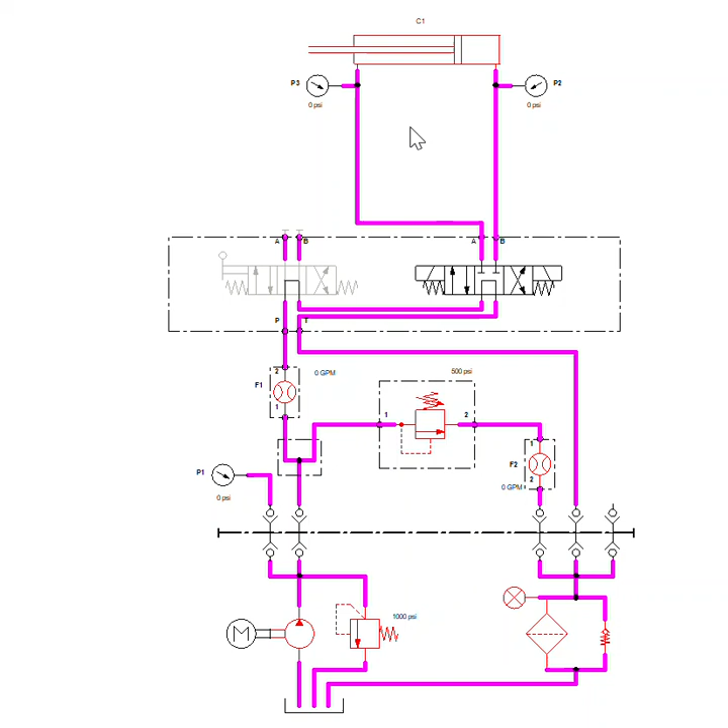Okay, this is MECH1395 hydraulic activity number 5. We're starting off with a fairly familiar circuit, single-ended cylinder, double acting, controlled by our directional control valve, which is solenoid operated, 3-position, 4-way, tandem center, spring-centered. And we have flow meter F1 measuring the flow going into the valve, into the cylinder, and F2 measures the flow going out of the relief valve and back to tank.

So we've seen this circuit before, simple reciprocating cylinder, and if we simulate it, we can make the cylinder extend by shifting the valve. Full flow goes to the cylinder, no flow goes through the relief valve until the cylinder is extended and deadheaded, at which point we can set our valve and retract it the same way. While it's retracting, again, 1 GPM going in, no flow going through the relief valve, and it retracts and extends at full speed. Whatever speed 1 GPM and those two retract and extend areas provide, that's the speed it goes at.

If what you need is to control the speed of the cylinder, there's a way to do that, and it's called metering. We're using this valve, a metering valve. It's a one-way needle valve, with a check valve beside it. And there's different ways we can use this. There's different configurations. And it's not exactly obvious what's going on, but in fact, the reason why this valve can be used to control the cylinder speed is that as you close this needle valve down, you create resistance to flow, which increases the system pressure down here.

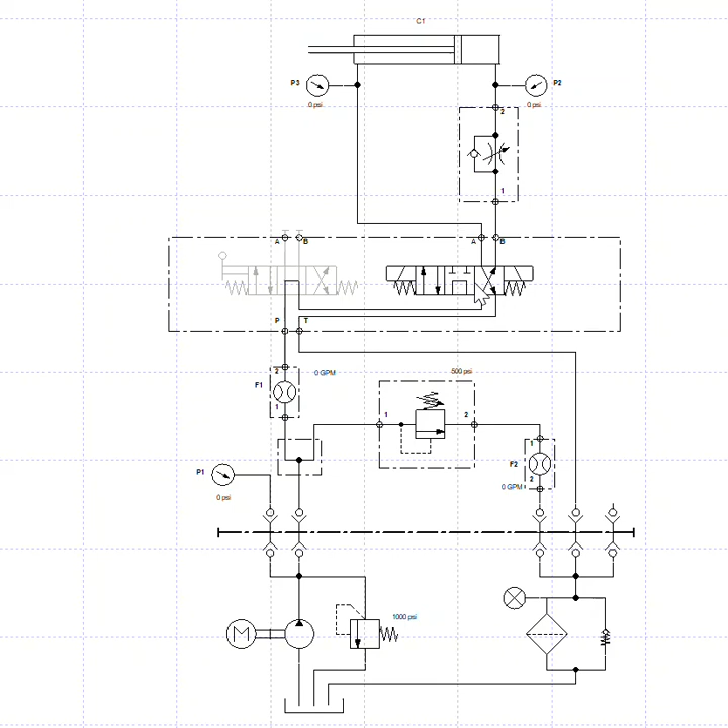Let's watch this. I'm going to start off with this valve fully open. Put the directional valve in its neutral position here. And I'll start with this valve wide open. So we have pump flow going at 1 GPM through the flow meter, through the valve, neutral, back to tank. No flow through the relief valve, and this is wide open.

Again, we can retract the cylinder at full speed, and when you do that, pump flow goes into the retract chamber and flow comes out to the extend port, and it comes to this valve, and it could go through this needle metering adjustable part, or it can just go freely through the check valve and back to tank. To extend the cylinder, flow has to go through the needle valve. It can't go through the check valve. Right now the needle valve's wide open, so we don't have any speed control, and we can still see that it was full 1 GPM going to extend the cylinder.

What I'm going to do though is I'm going to close this valve a little bit. I'll make it about only half open, so it represents some restriction now. When I extend the cylinder now, watch what happens. Full flow, still 1 GPM going in there, slightly higher pressure. Maybe I need to close this a bit more. Let's try it again at this particular closure. Retract the cylinder.

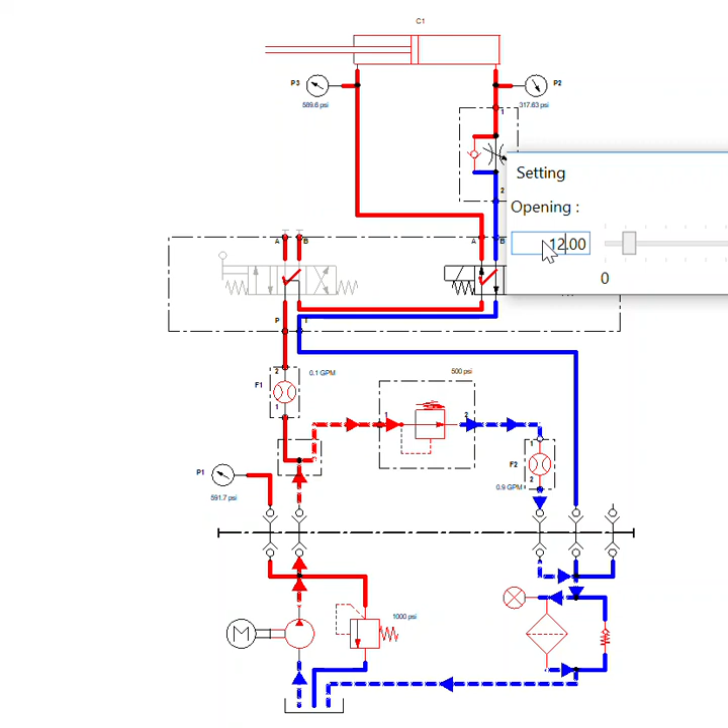I can increase this by opening that valve a little bit. And now we have a faster retraction. Well, not much faster. So notice the flow coming out has to go through the needle valve. To extend it, flow goes in freely through the check valve and comes out freely to tank. So there's no speed control on extension, just retraction.

And it's because the oil being pushed out of the cylinder has a back pressure. See this pressure here in P2 inside the cylinder? It's caused by the resistance to flow through this needle valve, which creates a higher pressure here, which is the same as the pressure back at the pump that pushes some flow through the relief valve. So we have metering in on extension and metering out on extension to control extend speed. And we have metering in on retraction and metering out on retraction to control the retract speed.

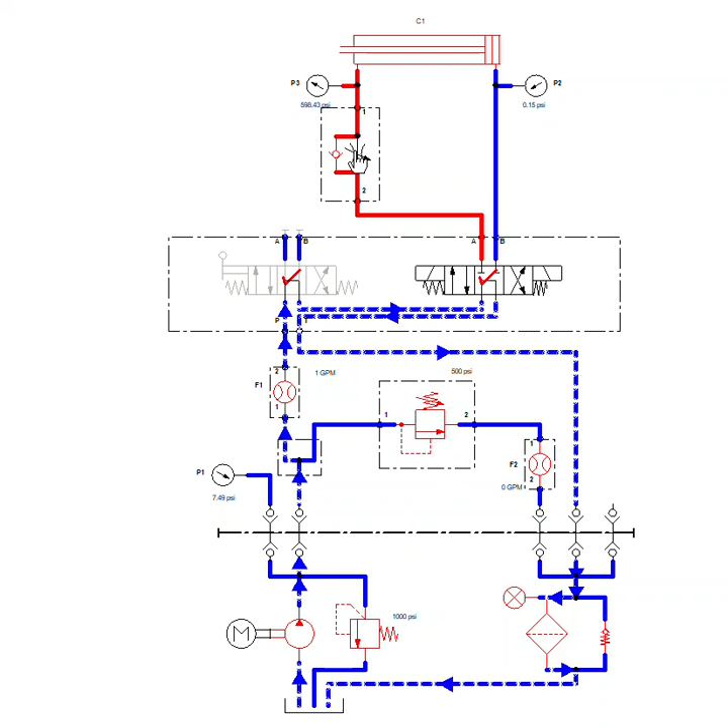The dangerous one is the one with metering out on extension. This is the one that can cause a pressure intensification problem in here and result in potentially dangerously high pressures, certainly pressures higher than the relief valve is set for, which might make you wonder why ever bother with this at all. If you can control the extend speed with metering in on extension like this, and there is no problem with pressure intensification, right? This pressure is 0. The pressure inside the cylinder is low. So why ever use the one with a potential problem?

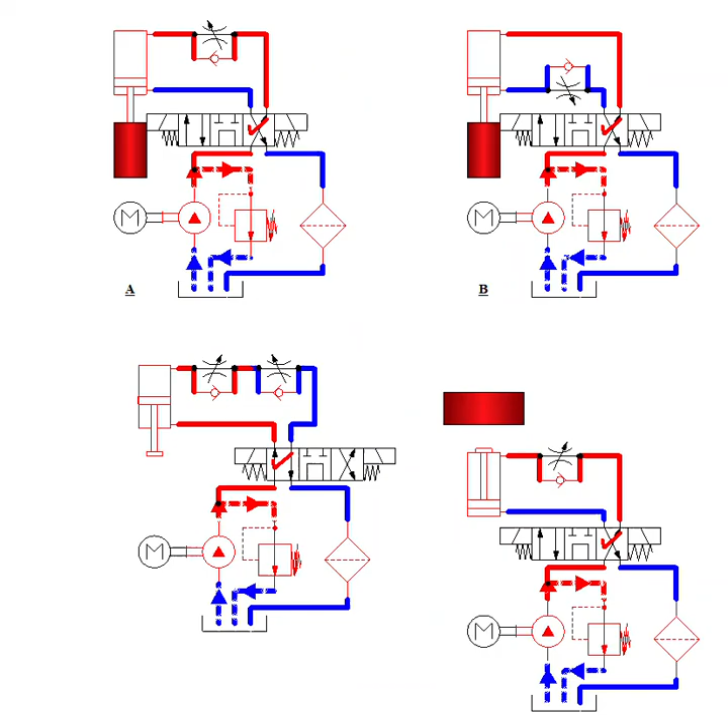Well, it's because sometimes loads can be so-called overrunning loads. If there were a load tending to pull this piston rod out, something in the external world that tends to pull this out hard, metering in doesn't really work. You just push the oil out of the retract port back to tank and you can draw a vacuum in here. But metering out on extension, imagine if during cylinder extension you're also pulling really hard to the left on the piston rod. Let me increase the speed.

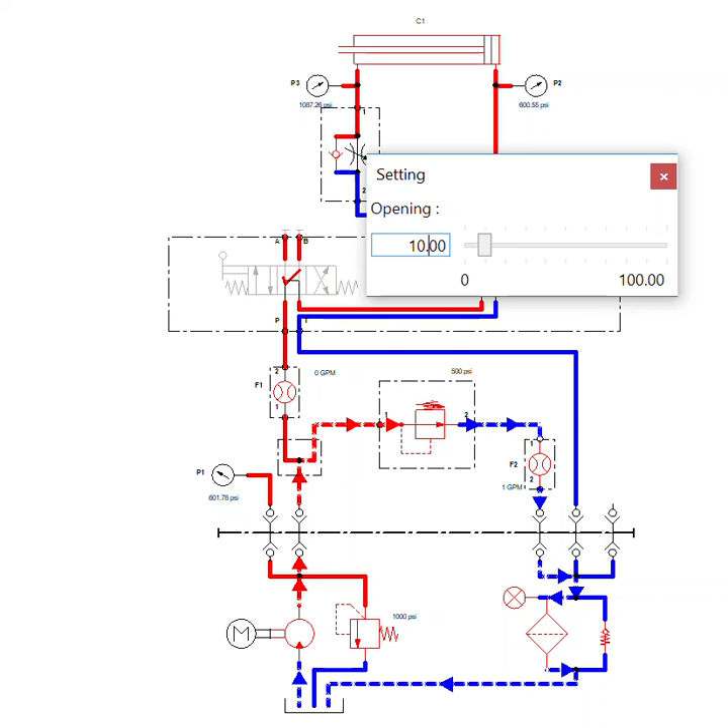Well, pulling hard on the piston rod would tend to push this oil out through the valve that's controlling it. So metering out is good for controlling so-called overrunning loads. Overrunning loads are external loads that are in the same direction as the cylinder's motion. If the cylinder is extending and the load on it is pulling it to extend, that's called an overrunning load, and you have to get in the way of the oil exiting the cylinder in order to control that. There'll be more on this later.